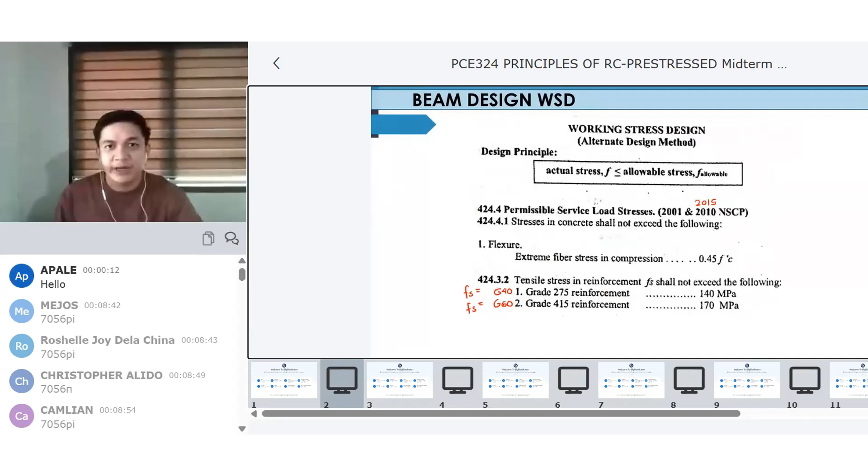Ayan. So ito po yung topic natin for today. We will have another examples. So we will give another examples for our beam design na WSD, which stands for Working Stress Design. Pinag-usapan na po natin last time yung concept niya, 'di ba? Pero wala pa po tayong example na doble siya, 'di ba?

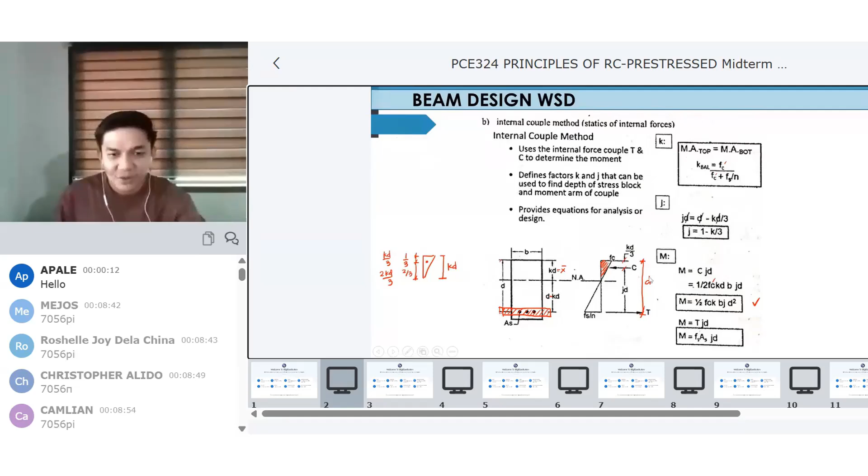Single pa lang yun last time, ibig sabihin sa baba pa lang yung kailangan ng rebars, no? Yung AS. So, try natin what if kailangan or binigyan tayo ng bakal or yung compression bars sa itaas, or are needed for our design. Okay, so let's start with our example.

So, number 3, problem. 300 mm by 600 mm reinforced concrete beam section is reinforced with 4 28 mm diameter na tension steel at effective depth of 536 and 2 28 mm diameter compression steel at depth sa taas, no, effective depth is 64 mm. The section is subjected to a bending moment of 150 kilonewton meter. FC prime natin is 21 megapascal. Fs is 165 megapascal and N is equivalent to 9. So find the maximum stress in concrete.

So hinahanap natin sa maximum stress is our FC, 'di ba? Kapag maximum, ang formula po natin is FC is equivalent to MC over I. Pag sinabi pong maximum, ang gagawin po natin is yung C na gagamitin is yung X bar. 'Di ba? From our neutral axis up to the topmost fiber. Pero i-compare natin, 'di ba, kay concrete tsaka kay steel. Pero pag equate mo sila na the same lang din yung lalabas.

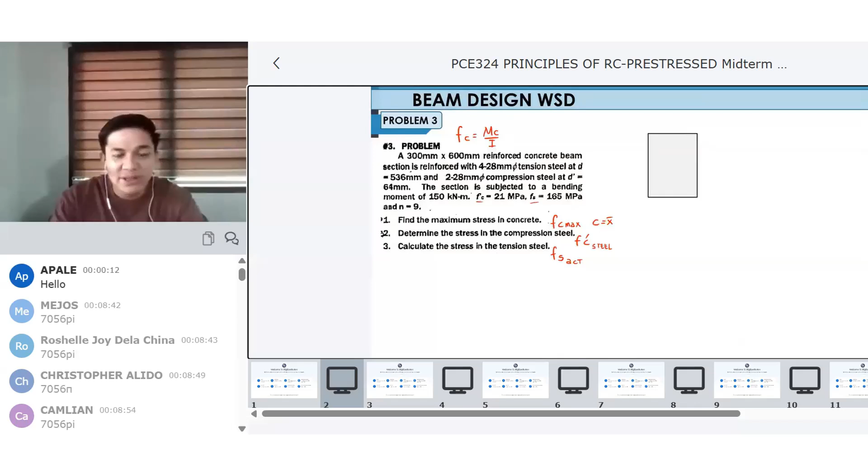Then kay number 3, yung hinahanap po natin is calculate the stress in the tension steel. So yung hinahanap is FS. Yung actual. And so yung FS po na 165 na binigay, that is kumbaga yung allowable niya, 'di ba? So yung actual talaga yung hahanapin natin. Okay, so I hope that alam na ninyo yung concept natin. If hindi pa, pakitingnan po yung first part natin for our concept. Apply natin kaagad sa ating problem.

So drawing po muna natin, binigyan tayo ng base na 300 millimeters. Meron po daw tayong dalawang rebars sa taas, compression bars. Ayan, depth niya is 64. Pagkatapos, meron tayong 4 na tension bars. Tapos, ang kanyang depth is 536. Ayan, move ko lang siya slide. Ayan, 536 and 64. Tapos, ano pa? Okay na yan. So, proceed tayo.

First thing na hinahanap is FC max. Formula ng FC natin is MC over I. Ang problema po natin is wala pa tayong C, which is our X bar. And wala din tayong I, inertia. So, take note, magta-transfer of moment of inertia po tayo. First thing that we need to do is to locate our neutral axis. This is our NA. Diba? Neutral axis.

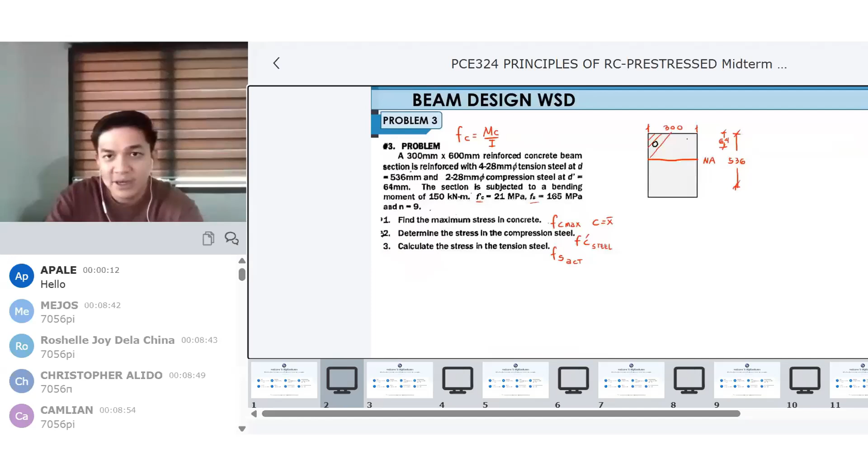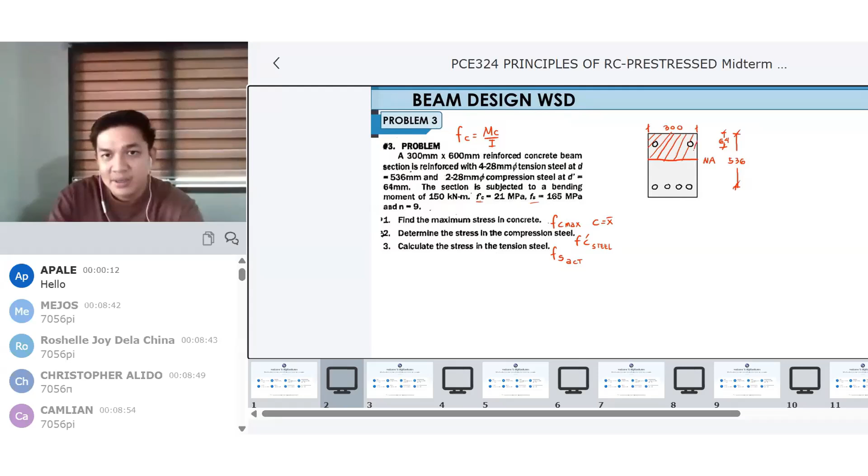Ito yung shaded part natin. So, ibahin ko lang po yung color ng ating rebars. Gawin kong color black. 'Di ba? Kasi pag color red, yan yung area ng ating concrete. Pag color black, area ng ating steel, 'di ba? And then sabi natin last time, we need to convert the area of our steel into the concrete na area. So, gagawin natin si color black na color red.

And take note sa ating past na mga problems sa WSD, singly po yun. Ibig sabihin yung taas natin na compression bars is kumbaga not needed. Ngayon, binigyan tayo, ibig sabihin needed po siya. So, i-convert natin siya. No? Kasali po siya sa ating pag-determine sa ating neutral axis. Okay? So, first thing, yung sa ilalim, di ba? Ito yung tension bars natin. I-convert po natin yung area ng steel into area ng concrete. So, gagawin natin siyang color red. So, this is our area of steel. No? Ibig sabihin, multiply natin sa N para maging area ng concrete na siya. So, same sa ginagawa po natin. Mapag-compute po sa kanya.

Lagay natin dito, NAS. That is equivalent to 9 yung ating N. Area ng steel sa ilalim is 4 na 0.25 times pi. Diameter po natin is 28. Paki-calculator po, squared. What is our NAS? Ayan, that is 7,056 pi. Ayan, that is our NAS. Ibig sabihin ng NAS is yung area ng steel sa ilalim na kinonvert into area of concrete.

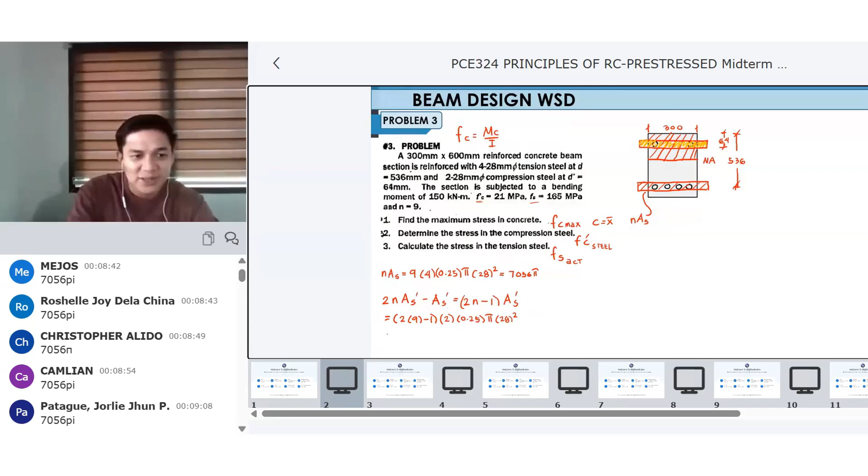So substitute po natin. Ito yung gagamitin natin. 2 times 9 minus 1, times AS prime. Area ng steel sa taas is 2 times 0.25 pi. Bakal natin is 28 mm squared. So what is our area of steel sa taas? Yes, that is 6664 pi. Lagay natin 6664 pi. Ayan, that's correct.

Okay, class, double check ko lang ha. Yung answer natin, 7056 pi, (2216). That's correct. 6664 pi, 2093. Yes, ayan, tama po. Okay, proceed po tayo. So, meron na tayong area ng steel sa baba, area ng concrete sa taas, area ng steel sa taas. So, pwede na po natin gamitan ng

equilibrium equation. So, ang gagamitin natin na equilibrium equation dito, class, is MA top, same last time, di ba? Is equivalent to our MA bottom. So, same lang po siya last time. Madadagdagan lang ng area ng ating steel sa taas. So, sa taas muna tayo na side. Unahin natin yung concrete. Ito, yung color red. So, that is 300 times, hindi natin alam, si X bar. Tapos, ang kanyang lever arm sa gitna ni X bar over 2. Next, yung area ng steel sa taas, compression steel, plus

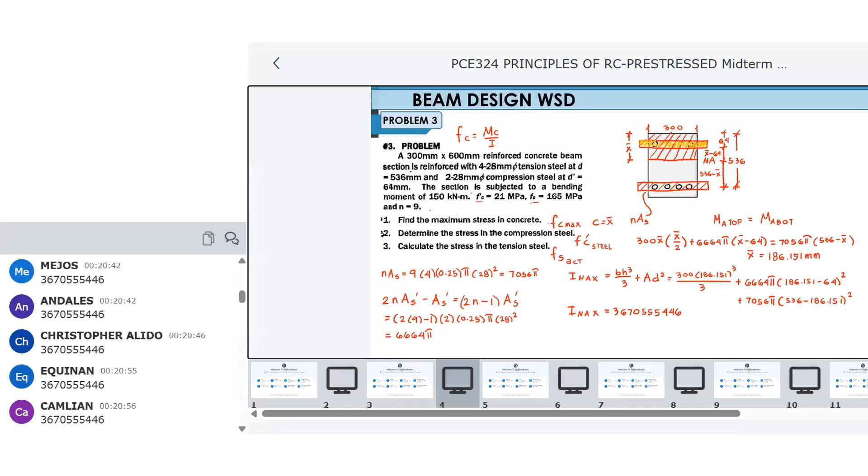So, paki-calculator po, what is our INAX? 3670, 555, 446. Ayan. So, kompleto na tayo. Meron na tayong X bar tsaka INAX. We can proceed with our number 1, number 2, and number 3 na questions.

So, number 1 is our FC max. Ibig sabihin, pag FC max, we will be using C as X bar, outermost fiber. So, lagay natin MC over I. Moment po natin binigay, that is 150 kilonewton meter. So, gawin po natin siyang Newton millimeters. X bar po natin is our C, which is 186.151 millimeter divided by our inertia, 3,670,000,000.

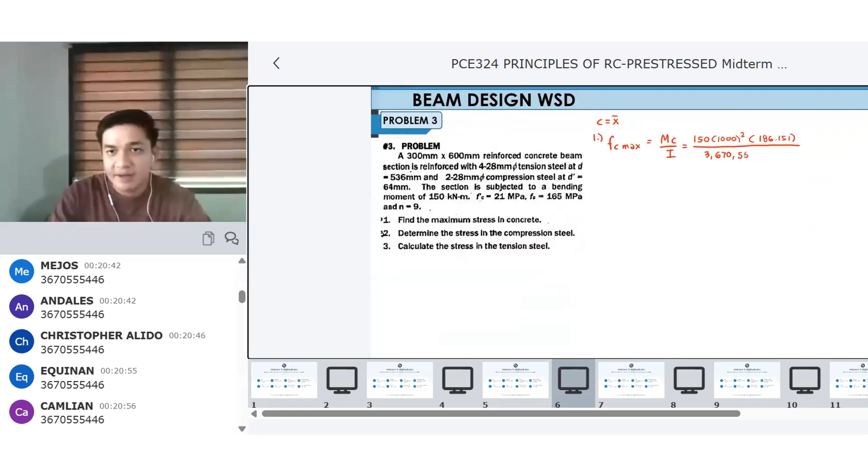555,446. So, paki-calculator po, ang labas po dito is Newton millimeter squared. So, that is in MPa, megapascal. Ayan, 7.607, that is in Newton millimeter squared, or also known as megapascal. Okay, next. This is our final answer.

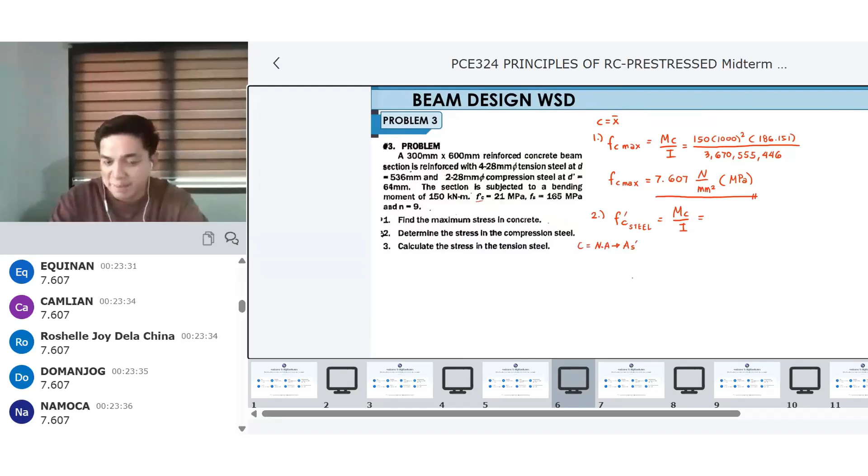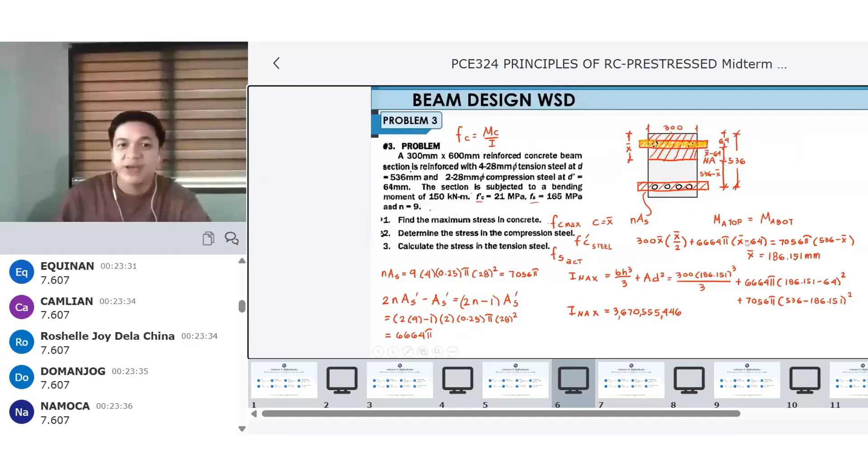Proceed naman tayo kay number 2 na hinahanap. Ang hinahanap po dito is si FC prime, di ba? Kay compression. Lalagyan ko lang ng steel ha, para hindi siya literal na FC prime. Okay. So same pa din yung formula, MC over I. Pero take note, yung C po natin na gagamitin is yung distance from our neutral axis papunta sa ating compression kay AS prime. Sino yan siya? NA papunta kay AS prime. Sa taas. So that is X bar minus 64. Ayan. So, 150,

1,000 squared. X bar is 186.151 minus 64 divided by inertia, 3,670,555,446. And then, eto class, meron po tayong catch. Take note na yung FC prime natin sa steel, we are comparing it na kinonvert natin. Diba? Lagay ko lang dito FC prime ng steel is equivalent po ng ating FC prime nung sa concrete na siya divided by 2N.

'Di ba? Kasi pag-convert natin, 'di ba, nag-multiply tayo ng 2n. So kapag ibabalik natin siya pagiging steel, so times 2n. So ibig sabihin, that is MC over I. 'Di ba? So that is FC prime over 2 times 9. So ibig sabihin, dadagdagan lang po natin yung ating denominator ng ito. 'Di ba? I-transfer natin sa kabila. So FC prime is equivalent to 2 times n, which is 9, MC over I. Ayan. Erase ko na lang yan. So ito yung formula.

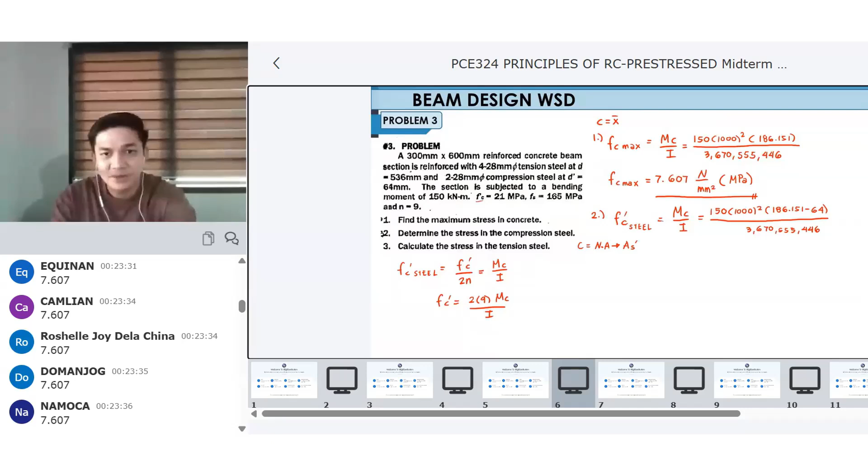So ito na yung FC prime talaga natin. FC prime, which is FC prime sa steel, FC prime over 2n. Transfer sa kabila, 2 times n of MC over I. So eto po, dadagdagan ko. Dito ko na lang ilagay sa last part ha. Mag-multiply dapat tayo ng 2 times 9. So this is 2 times n over I. Okay, paki-calculator po. Yes, that's correct. FC prime po natin is equivalent to 89.852.

Yan. So, ito na lang tandaan ninyo. Pag hinahanap yung stress sa steel, ibabalik mo siya sa dati. So, i-times mo lang ng 2n kapag nasa taas. Pag sa ilalim, multiply mo lang ng n. Pero depende, no? Ilagay po natin dito. So, that is MPa. Try natin. How about yung sa ilalim?

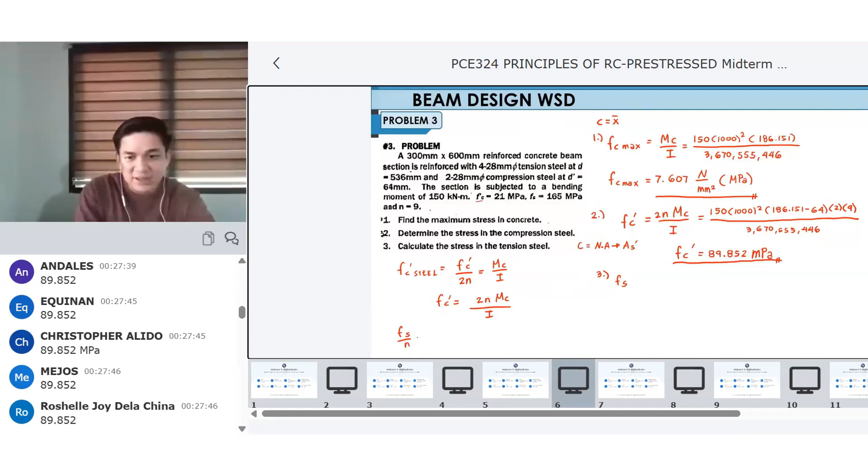Number 3. Yung hinahanap naman is stress in our tension side sa ilalim. So, medyo similar lang siya kay FC prime dito. Pero, di ba, pag sa baba, that is Fs. So, derive natin yung formula, same dito na part. Fs over N is equivalent to MC over I. Wait lang. Move ko lang class ha, kasi hindi siya masulatan. Fs over N is equivalent to MC over I. So, ibig sabihin yung formula ni Fs is equivalent to N times MC over I.

Ayun. So again, drawing natin na kung saan galing tong pinagsusulat ko. So 'di ba, meron tayong diagram for that, for our stress. Ito yung neutral axis natin. Dapat dadaan dyan yung ating line. Ayan siya, linear, 'di ba? Sa ilalim is Fs over N. That's why Fs over N equals MC over I. Sa itaas naman is, this is our FC. Tapos, etong kay steel na side, yan siya, is Fs prime over 2n. That's why ito, FC prime over 2n.

That's why yan yung formula natin. Okay, substitute na po natin lahat. N sa ilalim is 9. Again reminders, pag sa ilalim, tension side, N lang po ang i-multiply. Pag sa compression side is 2N, twice ng N. Okay, so 9 times 150

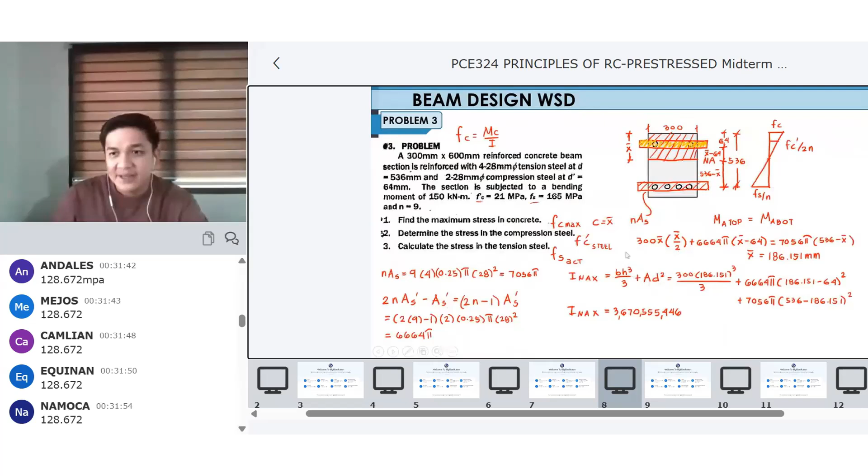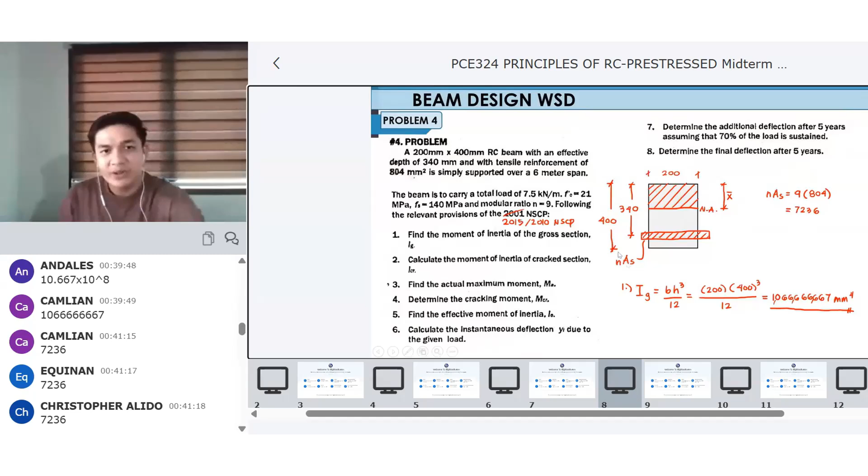7236, so mamaya pa yan gagamitin, no? Proceed tayo kay number 2. Ano yung hinahanap? ICR, inertia na crack. ICR. Ibig sabihin is i-involve na po natin yung ating tension na steel and compression. Pero dito wala tayong or walang binigay na compression na steel.

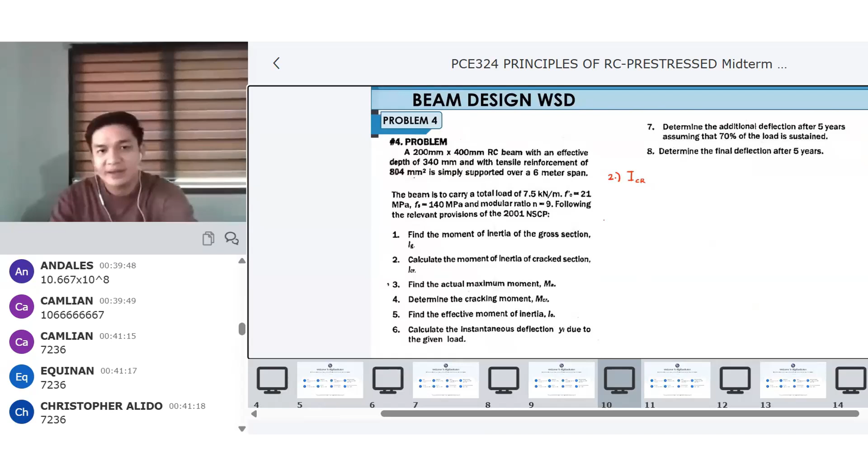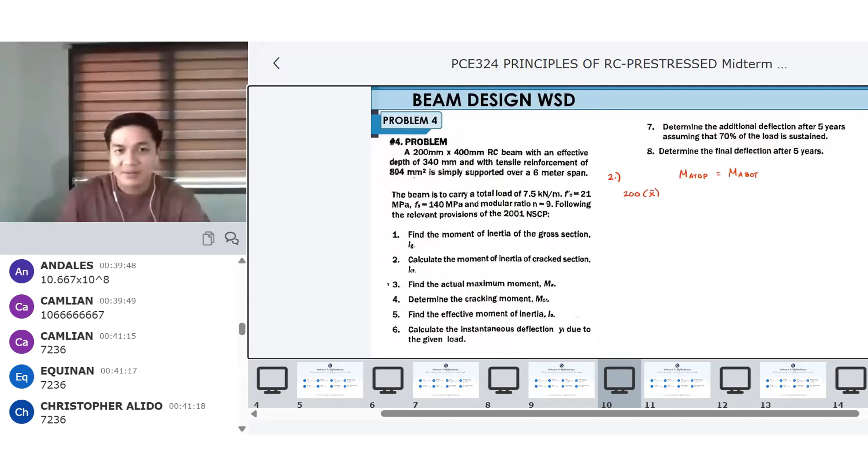So para makuha natin si ICR, kukunin po muna natin si X bar, no? So same pa rin yung concept natin. MA top is equivalent to our MA bottom. So ito mas madali kasi hindi tayo binigyan ng bakal sa taas. So unahin natin yung concrete na compression block na area that is equivalent to 200 times X bar. Then, center of gravity niya papunta sa neutral axis, that is X bar over 2. Ayan, we're done. Proceed tayo sa kabila.

MA bottom naman tayo. So, MA bottom natin is NAS. Ayan, si 7236 times, ano yun? NA papunta kay bottom bars. Ito, paano pag-compute? 340 minus X bar. So, lagay natin 340 minus X bar. Shift solve. What is our X bar class? Yes, that's correct. 124.790 millimeters. Okay. Pagkatapos ni X bar, pwede na tayong mag-ICR.

Formula is BH cube over 3, kapag nakapatong na siya sa ating neutral axis. Tapos yung transfer of moment of inertia natin is AD squared. Okay, so base natin is 200. Height natin is 124.790 cube divided by 3 plus transfer natin yung moment of inertia natin sa AS. No, area ng steel sa ilalim, that is 7,236 times, eto, lever arm niya papunta. This is also our D, 340 minus X bar, 124.790 squared.

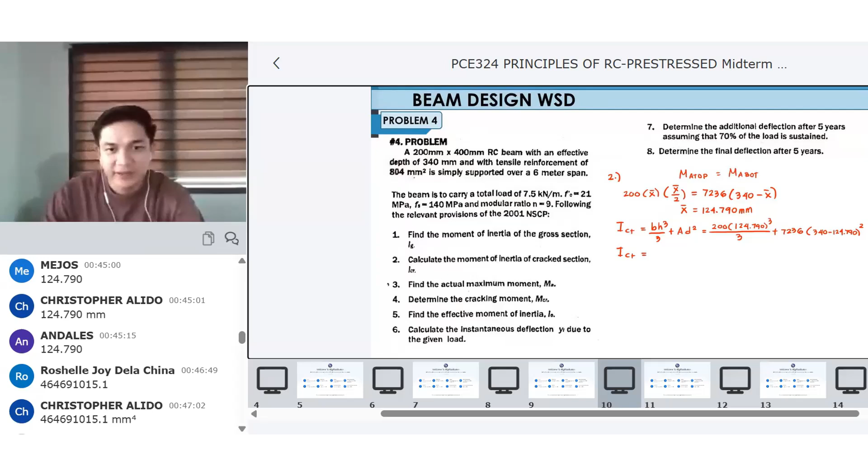Ayan, paki-calculator po, what is our ICR? 464,691,015.1 millimeter raised to 4. Ayan. Okay, that is our final answer.

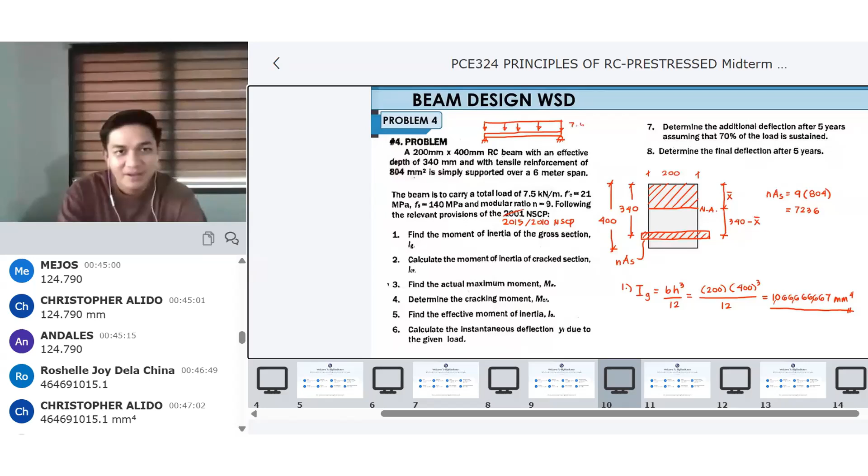Next, number 3. Find the actual maximum moment. Yung MA natin. So, number 3, ibig sabihin ng maximum moment is hindi, itsapwera natin yung crack. Yung moment lang talaga niya. Diba? So, yung sa beam, drawing natin yung beam natin. So, simply supported, yung actual, no? Ito, yung beam, roller or hinge. Sa kabila is roller. Yan. Then for example, meron tayong uniformly distributed. Ano yung load natin? Binigyan ba tayo ng load? Ito. 7.5 kilonewton per meter na uniformly distributed load.

Yes, what is our formula for uniformly distributed load, maximum moment? Yes, that's correct. WL squared over 8. Pag over 4, yan yung point load. PL over 4. Okay, that's correct. So, lagay lang po natin. W is 7.5. Length is 6 meters. Ayan, lagyan natin ng measurement. Paki-calculator po, what is our MA? So, kumbaga, yung actual na maximum moment is literal na actual. WL squared over 8 lang kaagad. 33.75. That's correct. Kilonewton meter. Final answer.

Next, number 4. Ano naman din yung pinapahanap sa atin? Determine the cracking moment. Ibig sabihin yung ano na talaga, yung sa loob niya mismo na moment, galing sa steel, kumbaga galing sa bakal natin, kumbaga allowable yung pinapahanap kay number 4. So, meron tayong formula kanina. Ano yun? Ito. MCR is equivalent to FR IG over YT. Kapag ang FR naman na gagamitin, pag 2001 is 0.7 FC prime. Kapag 2010/2015 is 0.62 lambda FC prime. Okay, so gamitin natin is si 2010-2015. Ibahin natin yung instruction niya na 2001.

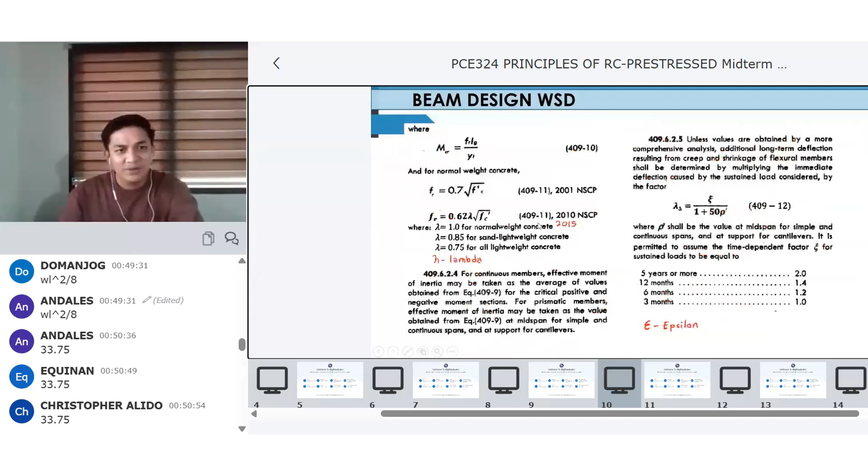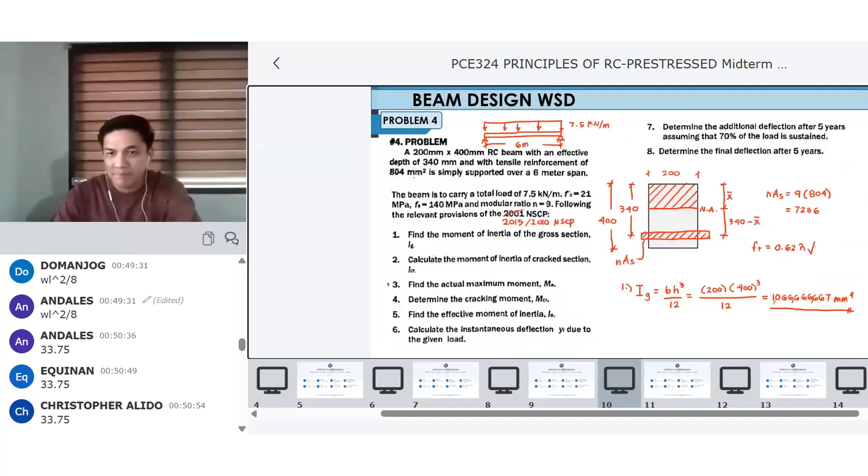So, ilagay natin MCR is equivalent to FR times IG over YT. So, FR natin, unahin muna natin si FR. Ito ko na lang ilalagay ha. FR is equivalent to, ano yun? Kaso hindi tayo binigyan ng lambda. Sige lang. 0.62 lambda times FC prime. Ayan. Then, assume natin normal concrete. Kasi hindi naman din binigay, no?

So, assume normal concrete. So, hindi po siya lightweight. So, ang lambda natin ang gagamitin is 1. Yan siya. For normal weight concrete, 1 yung ating lambda. So, eto, yung FR natin is magiging 0.62. Lambda is 1. Then, FC prime natin is 21. Ayan. So, hindi ko na siya ipapakompute. Idiretso na natin sa formula doon sa kabila. So, this will become 0.62 times 1 times square root of 21.

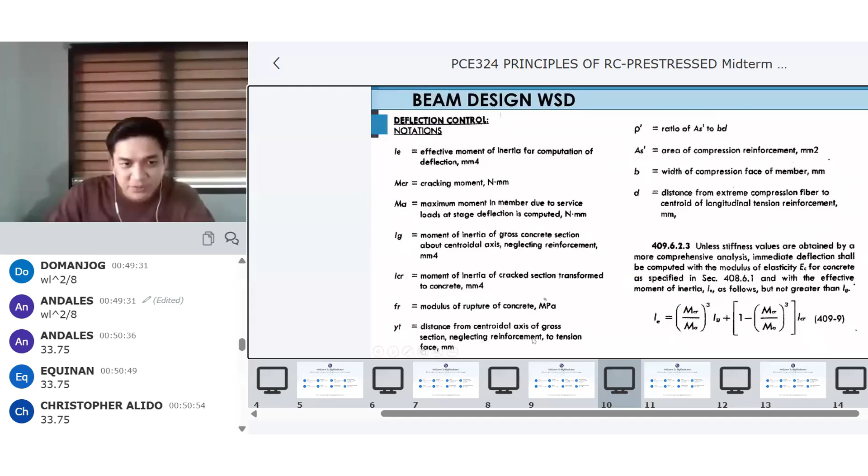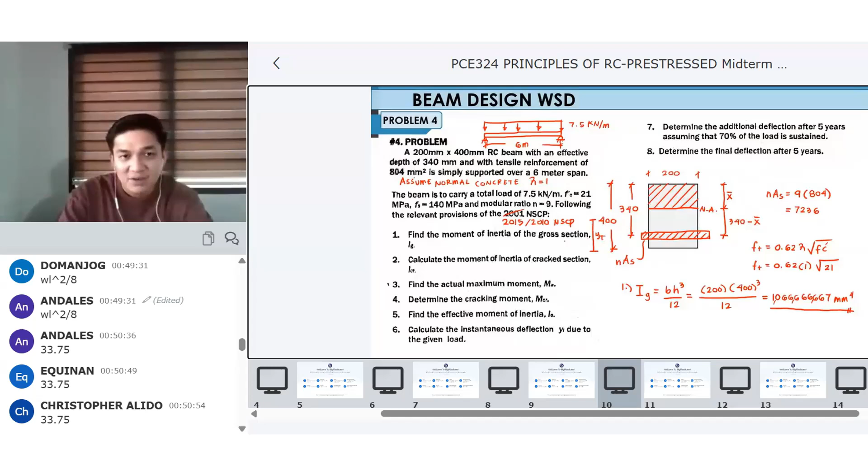IG is 1,066,666,667 over YT. Ano yung YT natin dito? From our definition, distance from centroidal axis of gross neglecting reinforcement to tension face. Okay. So, ibig sabihin, from our neutral axis, pero yung walang bakal. Diba? So, ibig sabihin, yung neutral axis natin na walang bakal, or ibig sabihin, neglect the bakal is kalahati. So, eto papunta dito, eto yung ating YT, which is clearly, YT natin is 400 divided by 2. Okay? So, that is 400 divided by 2. Or pwedeng i-type 200.

Papunta sa tension side. So, paki-calculator po, what is our MCR? Yes, 15,153,050.3. So, that is in Newton millimeter. Kung gusto mong maging kilonewton meter, divide lang natin sa 1,000 squared. So, 15.153 kilonewton meter. Final answer.

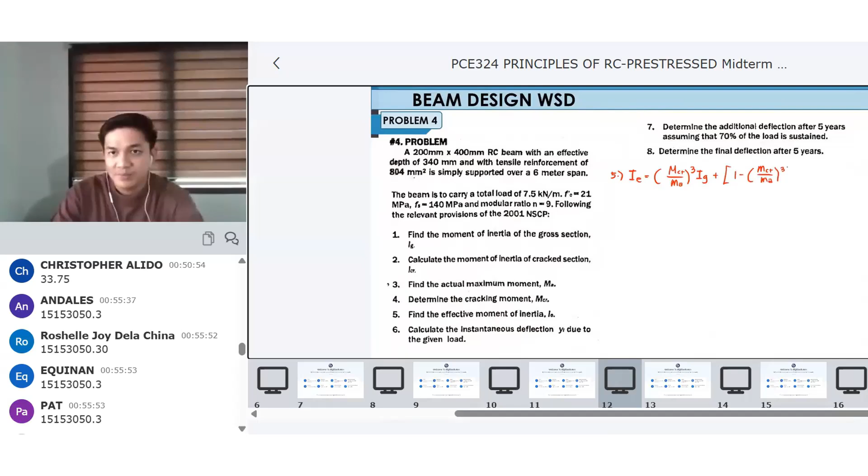Number 5. Find the effective moment of inertia. So, lagay natin number 5. Effective. May formula tayo niyan. Yung formula natin dyan, ito, mataas: MCR cube over MA. Dahan-dahan kong isulat. IE equals MCR over MA cube times IG plus 1 minus MCR over MA cube, times ICR.

Ayan. So, this is just a matter of memorization and substitution. Substitute lang po natin lahat dito. IE is equivalent to, meron na po tayong MCR, pero ang ilalagay ko is yung naka-Newton millimeter lang muna: 15,153,050.3 over MA, na gagawin ko muna siyang Newton millimeter. So, 33.75 times 1,000 squared para maging Newton millimeter siya. Tapos, times, or cube, IG. Ito, 1 billion.

0.6666667. Haba naman, no? Sa ilalim ko na idugtong plus 1 minus 15,153,050.3 over 33.75 times 1,000 squared, cube. Then last, si ICR, 464,691,015.1. Ayun. Paki-calculator po, what is our IE? Effective moment of inertia. 54,482,596.53. Ayan. Inertia ito, so mm raised to 4.

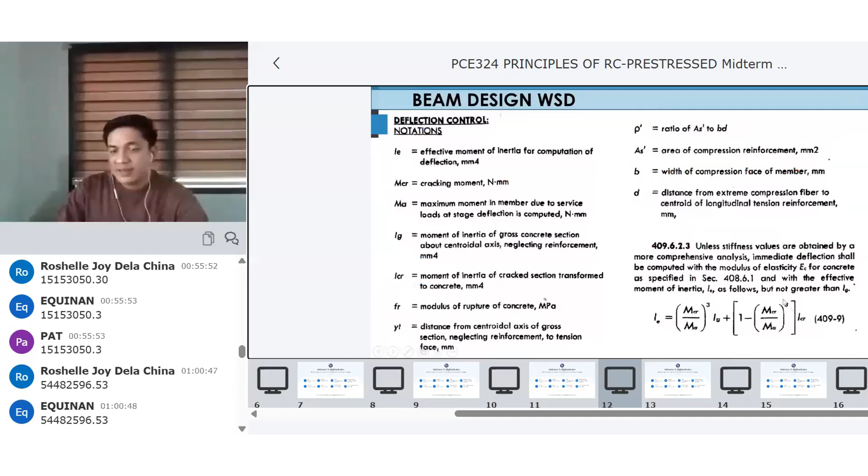So meron tayong note, not greater than, hindi daw siya pwedeng lumampas kay IG. So ano ba yung IG natin? IG natin is 1,066,666,667. Ayan. So again, kapag yung IE natin is lalampas kay IG, so IG po yung sagot natin para kay IE.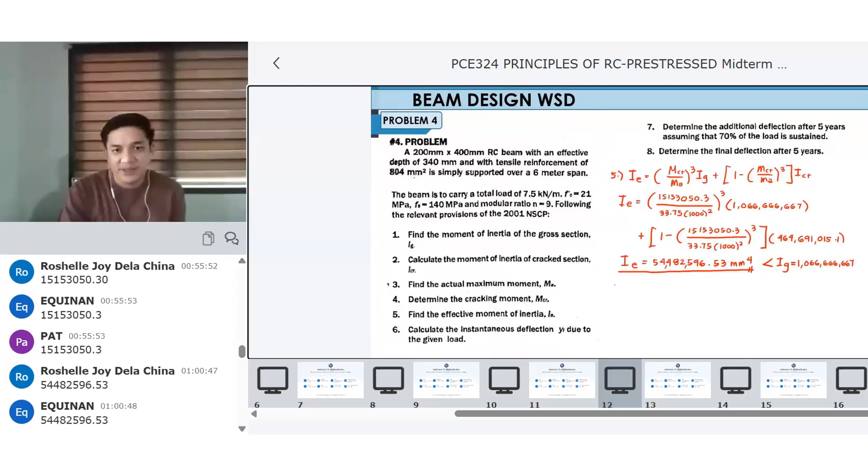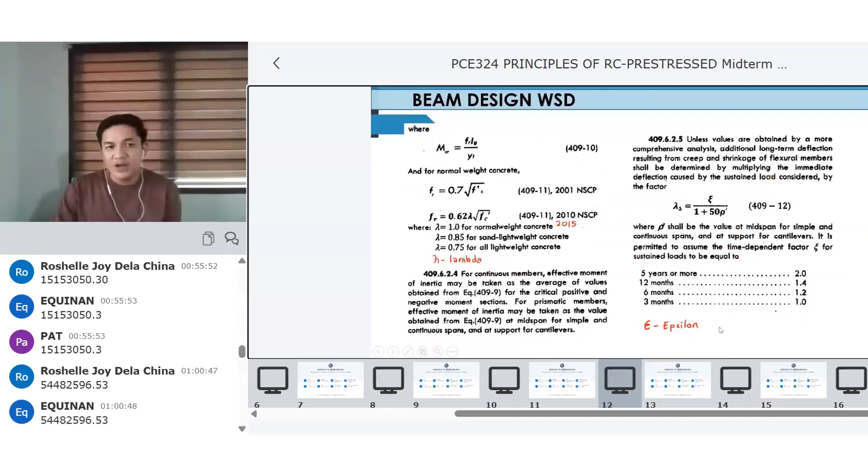So next, number 6, calculate the instantaneous deflection YT due to the given load. Ayun. So YT. Formula po ito, which is hindi binigay dito sa code natin. Yung formula po nito is nasa theory of structures natin or mechanics of deformable bodies. Shortcut po siyang formula. Pag meron po tayong uniformly distributed load, ang maximum po natin na deflection is 5WL raised to 4 divided by 384 times modulus of elasticity of concrete, then IE. Formula po yan kapag uniformly distributed load, nasa strength of materials.

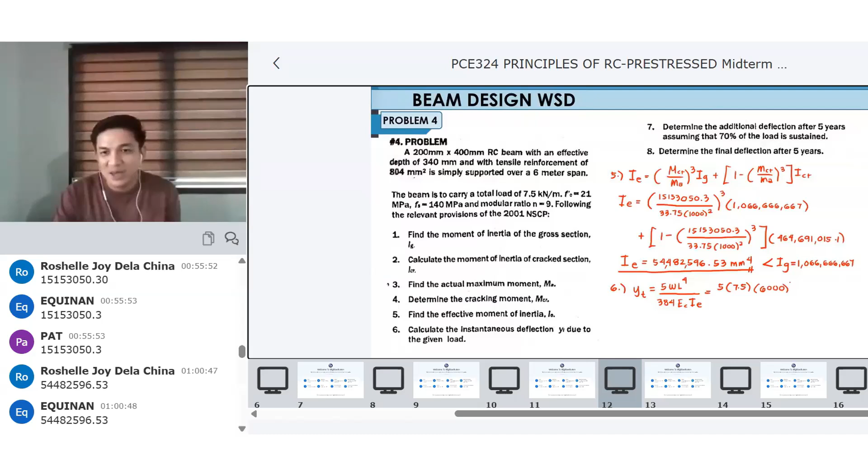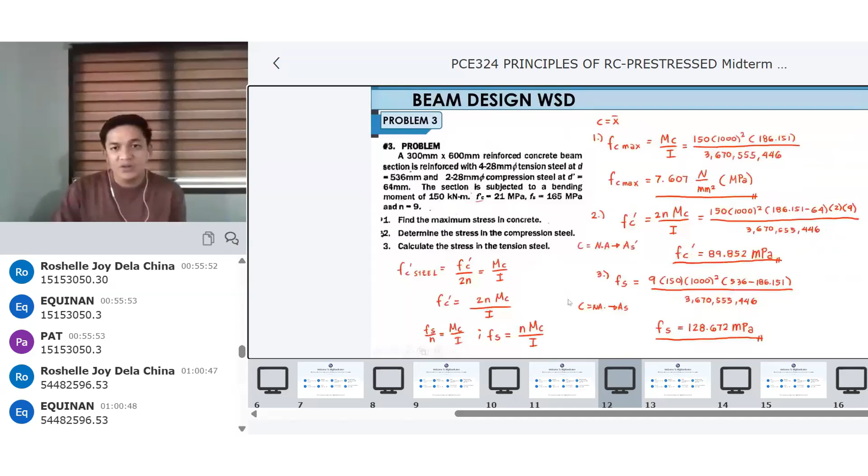So, substitute natin 5. W natin is 7.5 times 6,000 mm raised to 4 divided by 384 EC. Modulus of elasticity of concrete. Yung formula natin sa modulus of elasticity of concrete, that is equivalent to 4,700 times square root of FC prime. FC prime natin is 21. Ayan. Then, IE, 54,482,596.53. So, YT is equivalent to, paki-calculator po.

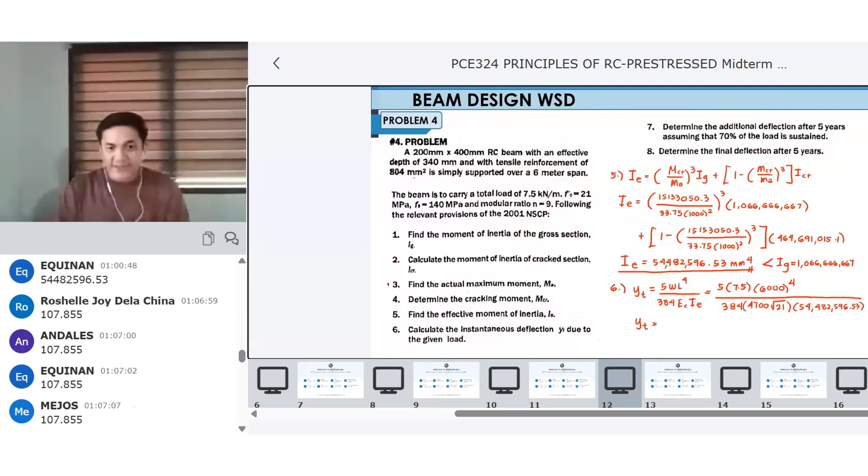Kumbaga, pag sinabing instantaneous, agad-agad. Pag lagay sa load, nag-deflect siya kaagad. Whereas kapag kay 7 and 8, as time passes by, lumalaki yung kanyang deflection. So, yan yung i-solve natin kay 7 and 8. Pero kay number 6 is instantaneous. Pagkalagay ng load, nag-deflect siya. So, what is our YT? 107.855. Ang laki naman. Ba't ang laki?

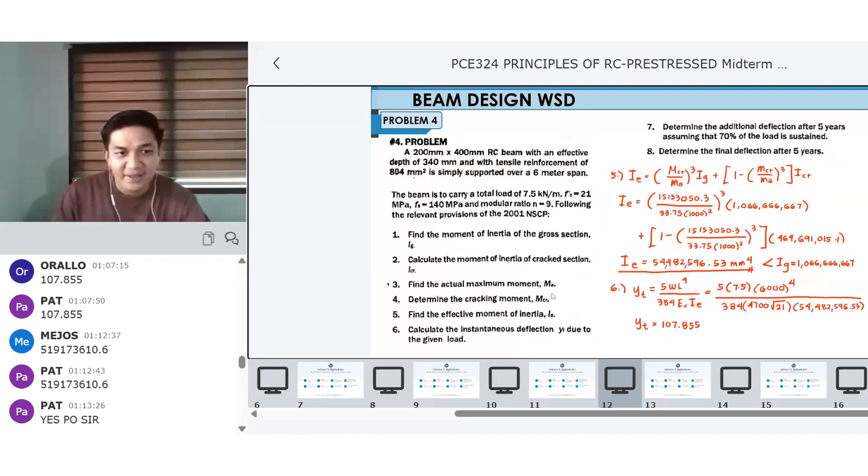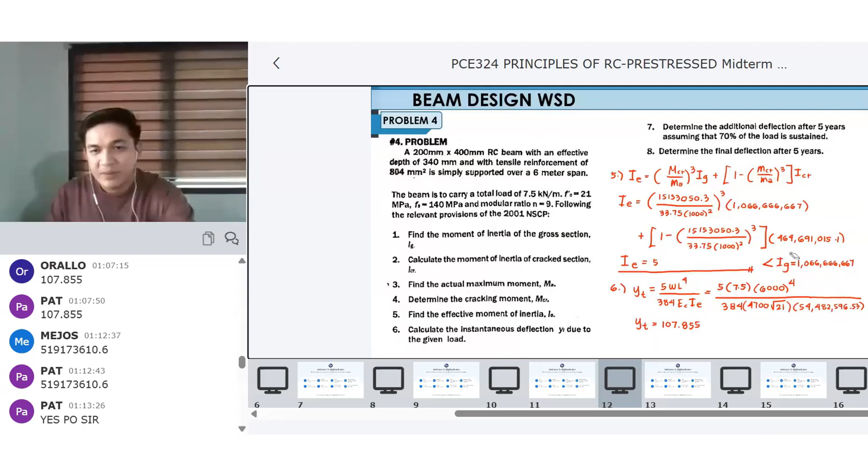Trace natin na. I think may mali tayo ng decimal places na paglagay, kasi malaki masyado yung 100 na deflection. Okay, calculator ulit ng IE natin. Ayun. Kulang, 519. Bakit 5-4 yung na-type kanina? Akala ko yun yung sagot. So, yan yung sagot kay IE. Tama? 519. Sige lang, baka namali lang silang dalawa pag-input. Ayan, yes, that's correct. Let us just assume na namali nila ng pag-calculator kanina. Erase ko muna. Kasi pag titingnan mo, malaki masyado yung 107 na deflection, class. So again po, correction tayo saglit.

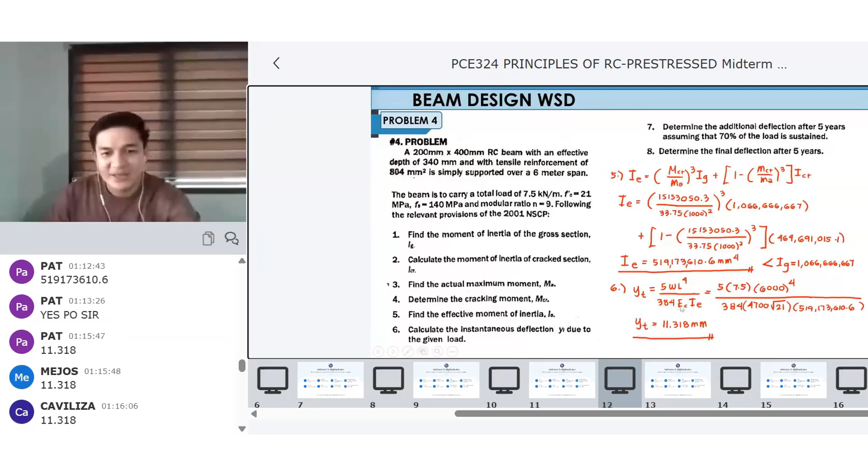519,173,610.6 yung ating IE. Millimeter raised to 4. So dito po sa ilalim, paki-change lang ng IE natin. Ayan, 519 million na siya. 173,610.6. So what is our new YT? Yes, that's correct. 11.318. Ayan. So reasonable na po yan ang deflection. Malaki masyado yung deflection na lumampas na ng 100, no? Delikado na yun masyado. Ayan, proceed tayo kay number 7, class.

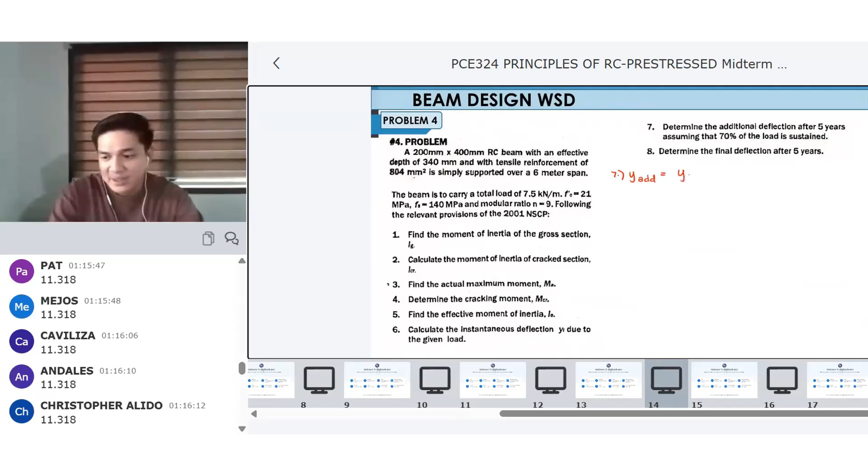Yung pinapahanap is additional. Kanina is instantaneous, ngayon is additional after 5 years, assuming that 70% of the load is sustained. So, ibig sabihin, yung hinahanap po natin dito is Y additional. Ibig sabihin ng Y is yung deflection. Y additional is equivalent to our YT natin multiplied by our lambda. Ibig sabihin yung percentage. So, yung YT po natin kanina is 11.318.

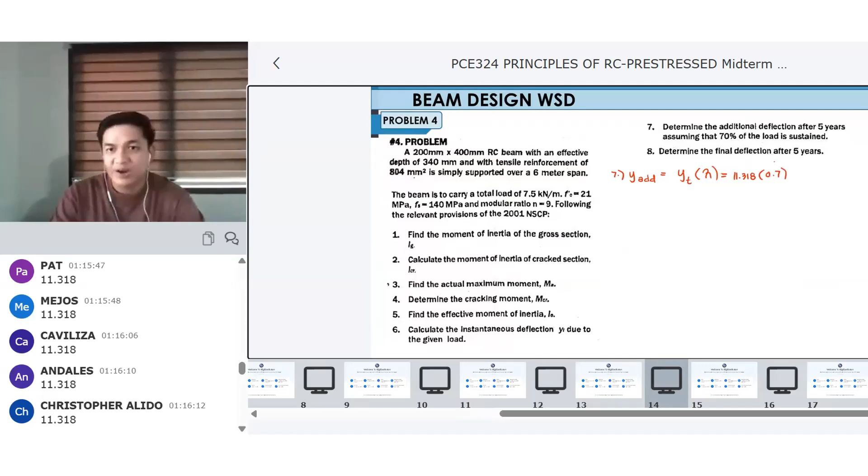Multiply lang natin sa 70%. So, 0.7. Final answer. So, what is our additional deflection after 5 years, assuming 70% of the load is sustained? Yes, that's correct. 7.923 millimeters. Ayan, final answer. And then last, number 8, final deflection after 5 years.

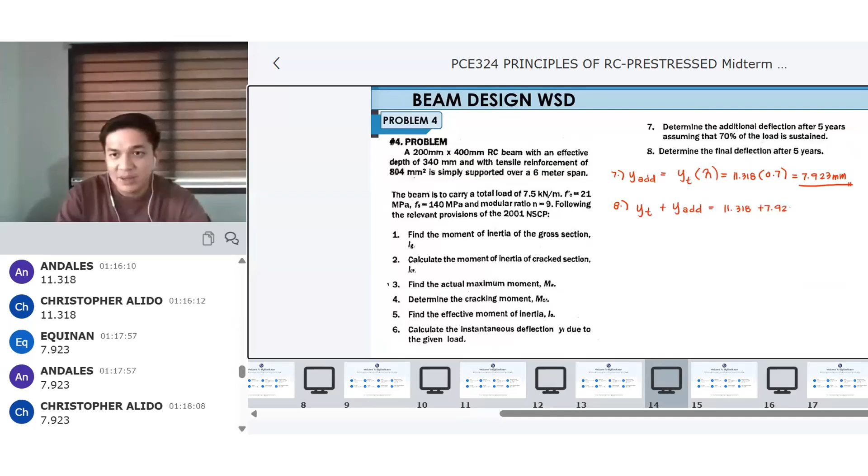So, ibig sabihin, yung YT lang, i-add lang natin yung additional. Yan na yung gagawin natin. So, 11.318 plus 7.923. Paki-calculator po. 19.241 millimeter, final answer. Ayan. Save po natin.

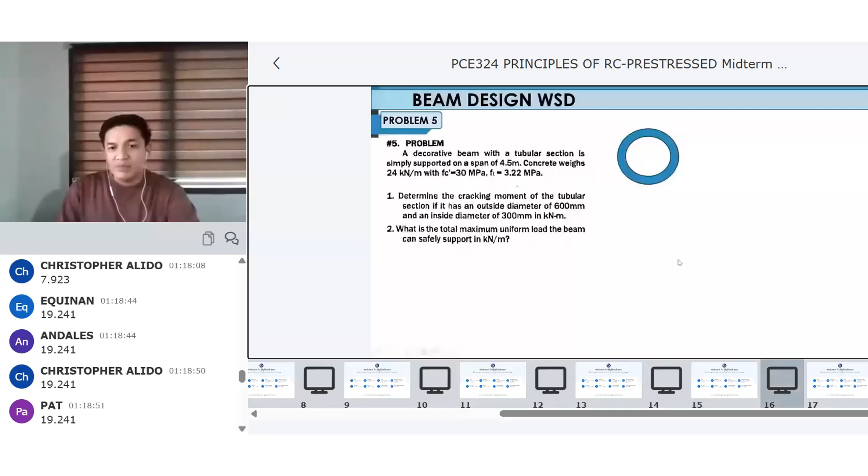Again, type sa ating chat box if you have any questions so far. If none, proceed po tayo sa ating last problem for beam design na WSD. So, don't worry. Ito, medyo maikli lang po siya. WSD yung gagamitin natin. Okay, let's start for our 5th example.

A decorative beam with a tubular section is simply supported on a span of 4.5 meters. Concrete weighs 24 kilonewton per meter with f'c is 30 megapascal and fr is 3.22 megapascal. So number 1, determine the cracking moment of tubular section if it has an outside diameter of 600 mm and an inside diameter of 300 mm in kilonewton meter. So, ang hinahanap dito, una is si MCR, cracking moment. Next, number 2. What is the total maximum uniform load of the beam can safely support? So, yung hinahanap is W.

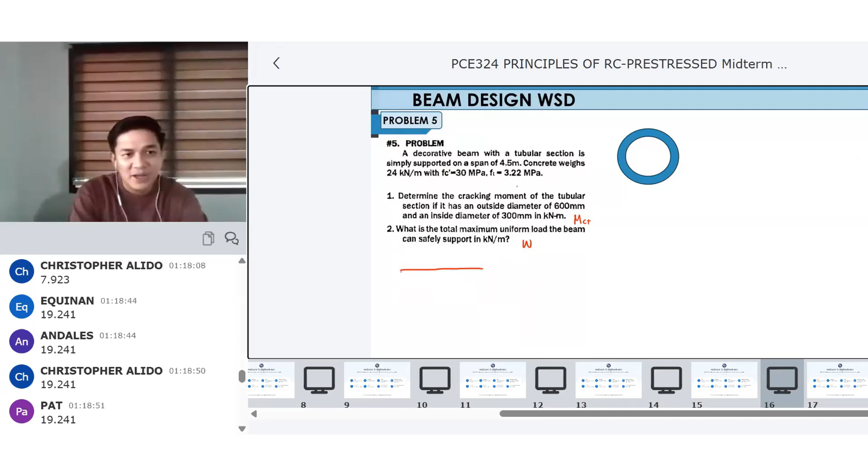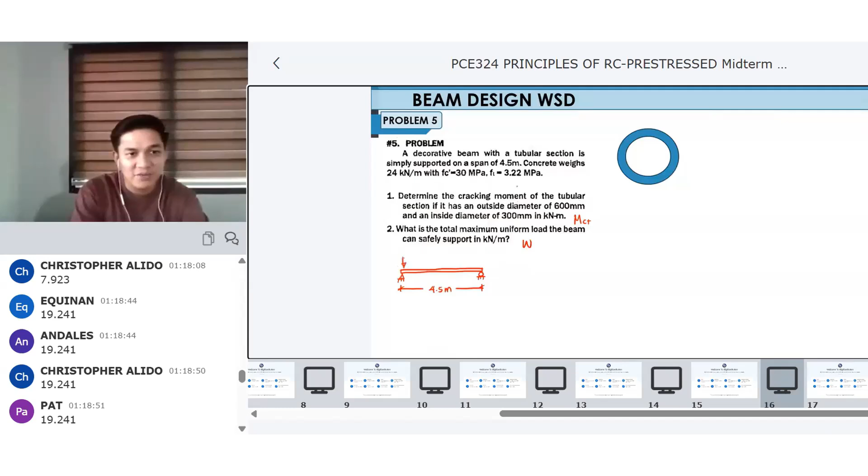Okay, so let's start again. Tubular po siya. Yung beam natin is circular. Simply supported po daw siya with a span of 4.5 meters. So, ang pinapahanap po sa atin is yung safe na uniform load na pwede nating ipatong sa kanya. Okay, so yung ating outside diameter, yan yung outside, is 600 mm. Yung inside diameter naman niya sa loob, ayan, this is 300 millimeters.

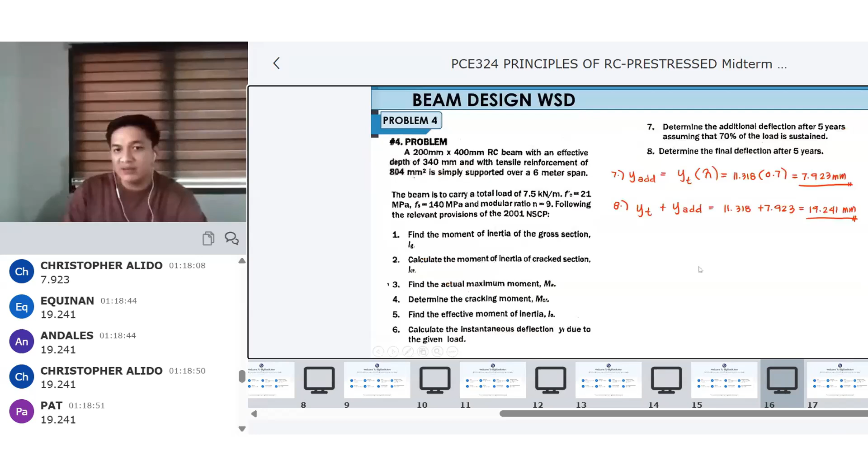Or mechanics. Kapag inertia ng circle is pi d raised to 4 over 64. Pero take note, meron tayong hollow sa loob. Ibig sabihin merong butas sa loob. So pi diameter sa outside raised to 4 minus diameter sa inside raised to 4 over 64. So yan po yung ating inertia kapag may butas. So pi 600, paki-calculator po, minus 300 squared, raised to 4 pala, over 64. What is our IG?

MCR pala. Ang gagamitin natin dito pagkuha kay M is stress is equivalent to MC over I. Ayan pala. So, kailangan natin si IG po muna. Ayan, that's correct. 596,411,7303 millimeter raised to 4. So, hindi na po tayo mag-transfer of moment of inertia kasi nasa loob naman din yung neutral axis, hindi siya na-transfer. So, next is our F.

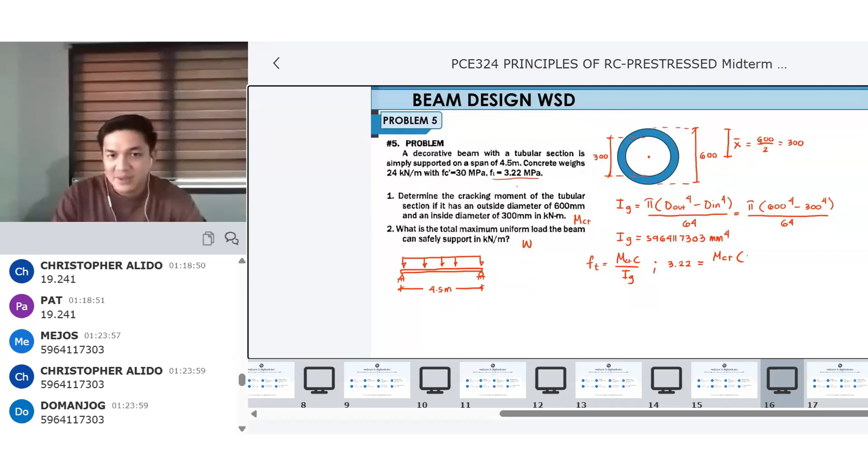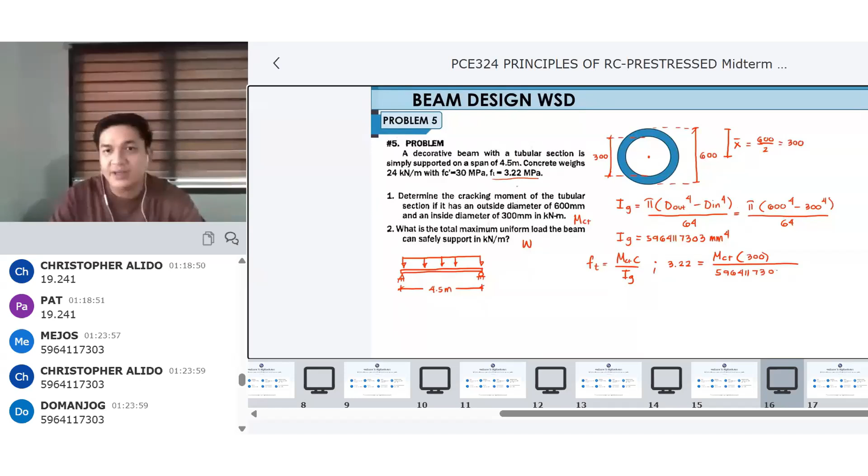So that is 300, which is 600 divided by 2. 300. So hindi na kagaya kanina na nag-solve pa. So 300 over IG. Paki-calculator po. 596,411,7303. And that's correct. 64,014,859.06. So this is in Newton millimeter. So i-divide lang po natin ng 1,000 squared. So bawasan natin ng 6. 64.015 kilonewton meter. Ayan, final answer.

Okay, last for this topic. Number 2. At ano daw yung ating W? So again, this is simply supported. So again, this is our simply supported beam. So yung ating M maximum po is equivalent to WL squared over 8. So substitute lang po natin lahat. 64.015 equals W times 4.5 squared over 8. Ayan, shift solve. What is our W? Ayan, very good. 25.290. That is in kilonewton per meter. That is our final answer.

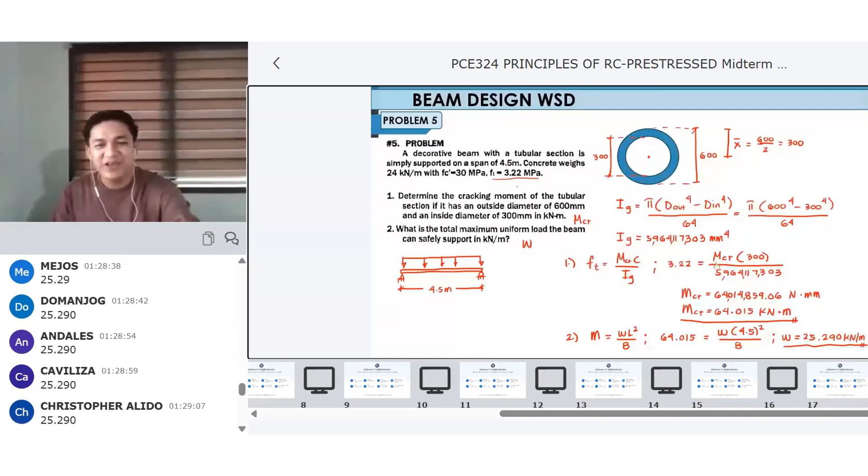Again, class, if you have any questions, type sa ating chat box. That ends our WSD na topic for our beam. Thank you for listening. I hope that you have learned something for this topic.